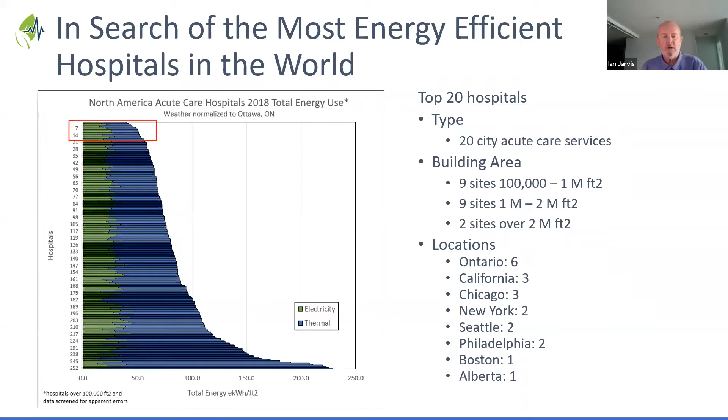So you'll see a lot more over the coming 12 months around finding the most energy efficient hospitals in the world, learning from them. Today, we're going to look particularly at the now 17 operational hospitals in Ontario and what we can learn from them. And those lessons get richer every year.

The other piece of the background I wanted to give you is we don't think that in principle, the roadmap to net zero is that complicated, especially in hospitals. So the 3 steps here, maximizing energy efficiency is self-evident. It's the most economical and efficient way of getting the numbers down. And from the previous chart, we can tell you, we can get pretty much close to half the way from current baselines to net zero just by getting efficiency right.

And that is the #1 task of every hospital on the line here. Where do you stand? How do you get to where you should be at the top of the benchmark chart? Heat recovery in hospitals is a big deal. That's one of the first discussions we had with the folks in the UK. Hospitals generate a huge amount of heat from equipment, from process loads. Recovering that heat, again, is the second most economical way of getting the emissions levels down to where they need to be.

And then, as we know, we have 2 geothermal projects within the group that we'll look at today, but on-site renewables and then purchase credits, that's the simple pathway. Getting it done in individual settings and individual sites is a lot more complicated. And in general, this is all about capital planning and asset management, much more than technology. And it's much more about operations than it is about capital investment.

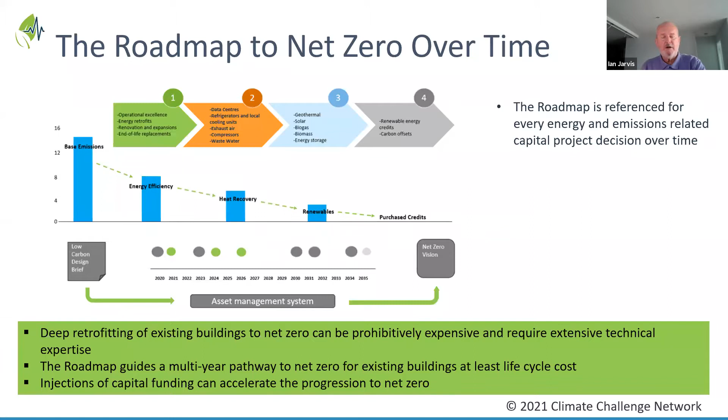So there's a few truisms that are emerging from all of this. But this practical pathway to net zero, we know what the steps are. Now we just have to figure out how to make them work. Let's talk about the big report. These are the hospitals that are taking part or are included in this year's analysis. There are 17 operational hospitals in this group. They add up to about 12.2 million square feet.

As Michael said, if you are one of these hospitals and you don't know what your code is, because we do this reporting anonymously, we always let the individual hospitals know where they stand, but this is not about shaming. And we're going to recognize some of the top performers here today with their permission, because it is about celebrating top performers. It's not about shaming anybody. It's about helping everybody move up the benchmark chart to where they should be.

So if you're one of these hospitals and you don't have your code, drop Michael either a chat or an email right now. He'll give you your code so you can follow the bouncing ball of where you stand relative to the data we're going to share today.

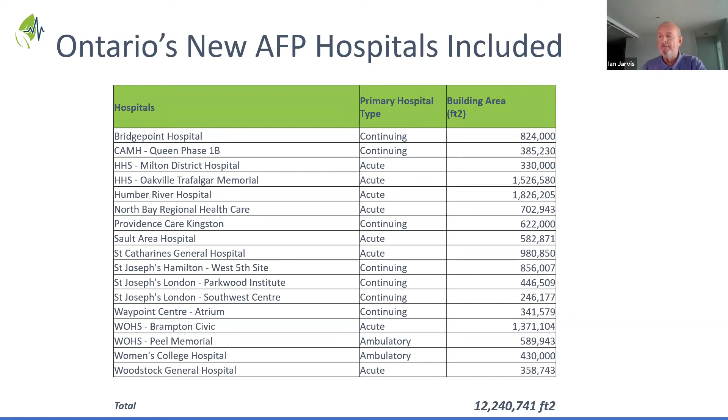The 2021 report is based on the calendar year 2020 data. This is the Greening Healthcare website. I hope that everybody knows where it is, because all of the good background research, all the previous reports are up at this location, but this is what the report looks like.

We're really happy. Chris Mackey, I think you're on the call today.

We're really happy to recognize Providence Care in Kingston as on the cover. We put a different hospital on each cover each year so that people don't mix them up and can't remember which one's which. But Providence Care, one of our top savers, and again, really instructional in terms of all of the hospitals that haven't yet reached the efficiency level that they should be capable of: what does it look like making that kind of progress over time? And we'll share a little bit of information on that going forward.

The core results come in two forms. One is in terms of total energy use, and Greening Healthcare measures the efficiency of hospitals, and this is important, by comparing your actual baseline use to the top quartile energy target for our whole data set for your type of hospital. So when we talk about savings potential, it's comparing your actual current energy use with what the top quartile hospital of your type is doing right now. And that quartile improves a bit every year because everybody's slowly, incrementally improving.

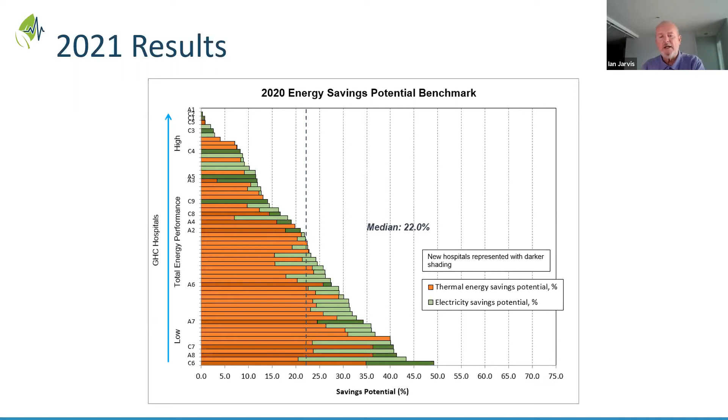So there's lots to learn from that group at the top because they've done it. They got it right. They've got to very high levels of efficiency. And there's lots to learn from the group at the bottom, which is what is not right yet that they're working on, and how can that be folded into the project development process for the more than 30 hospitals that are in the pipeline here, and I think something over 40 in the UK that are working their way through. So it's using the data, learning lessons and applying them so we keep getting better and better, as Michael said, to begin with. I want to take you one level deeper into this, but again, very briefly, all this is documented on the website and the white paper.

But the analysis looks at both electricity use and gas use and separates out the weather sensitive part around cooling electricity from base electricity. So we'll show you in the next chart how those benchmark against each other with these facilities. But essentially we can have a hospital that has very efficient lighting and fans, that has good base electric, but really inefficient air conditioning equipment that has high cooling electric. So the benchmarking goes to base and weather sensitive components on the electrical front. And each of those relates to certain building systems, and that's what guides the conversations we have with the hospitals about where can they improve and what systems should they attend to.

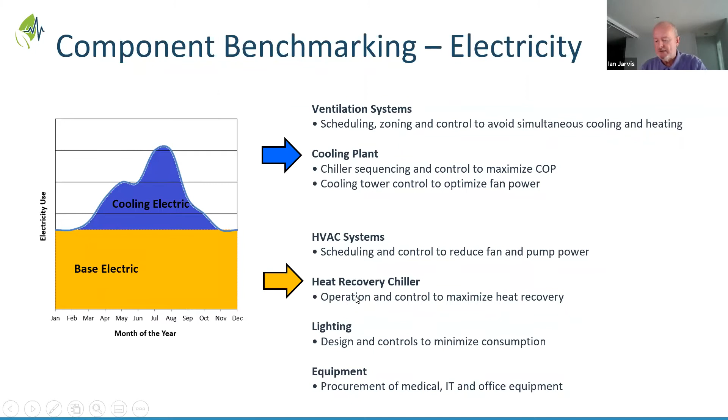The same on the thermal side, except it's flipped the other way during the wintertime. It's ventilation and humidification and building envelope that drive the weather sensitive gas or oil in the winter. And the base thermal is typically reheat and ventilation systems and the efficiency of the heating plant under summer type loads and the operation of process loads.

So again, this is worth looking deeper into, because for any hospital out there, this analysis points you directly to where the opportunities are for you to join those top performers and achieve those high levels of efficiency that we're looking for. So this becomes a big part of your energy efficiency roadmap.

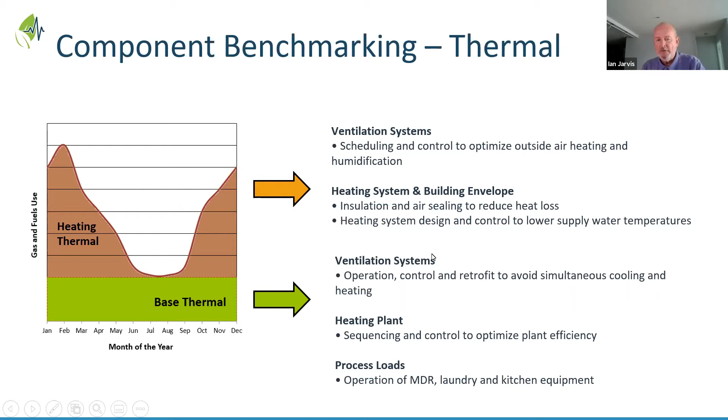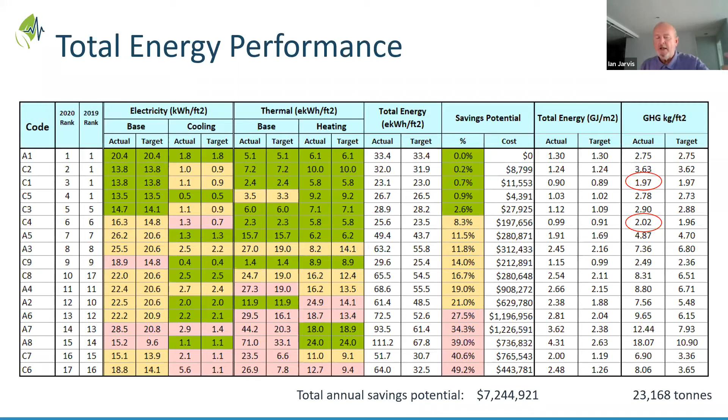and that is Greening Healthcare's goal in all of this, is to move the yardsticks and help everybody work up the benchmark charts that you looked at, and as Michael said, learn from those so that the next group of hospitals coming through will piggyback and be even better still.

We just want to briefly recognize the top performers. So the 4 that are at the top there, the ones that have largely met their, again, good practice targets, not best practice targets: Humber River, St. Joseph's in Hamilton, St. Joseph's Parkwood Institute in London, and William Osler Peel Memorial, and we'll hear a bit about that in just a moment. Peel Memorial right now is the lowest greenhouse gas emitter per square foot of all the hospitals in our data set.

There's geothermal on that site. And again, part of our conversation later with the panel is going to be around how do you incorporate those kinds of, if you like, what have been non-traditional approaches and actually get them in place and make them work. But, you know, we owe a lot to these 4 hospitals for getting it right and giving us the opportunity to figure out what right looks like and then share it with everybody else. So congratulations to the 4 of you.

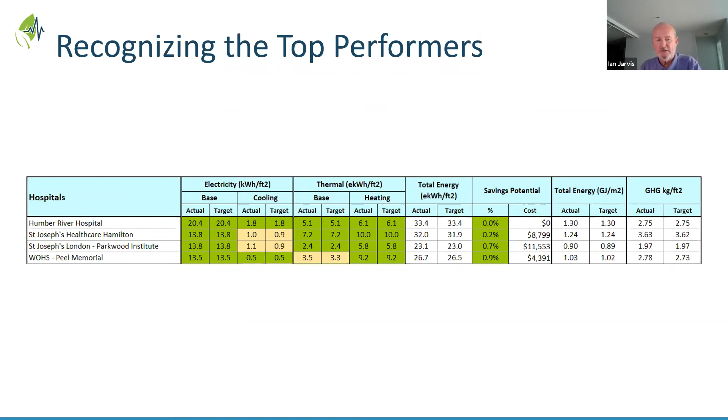We also want to talk about, and when you see the report, this is the whole chart that you see. So we've opened up 2 more columns here. Those columns are the change in energy use, weather normalized from the prior year. So the change from 2019 in electricity and thermal energy use. And again, we're going to look at a few of the hospitals that have had quite remarkable improvements, but the green numbers here are savings.

So over the past 12 months, by getting to grips with the operation of their facilities, they've achieved further efficiency improvements on the electrical side, and where it's red, by the way, they're creeping up a little bit. So again, if you're on this list, you can see that's what happened to you over the past 12 months. And we do want to talk to you about consolidating the savings and addressing the creeping increases.

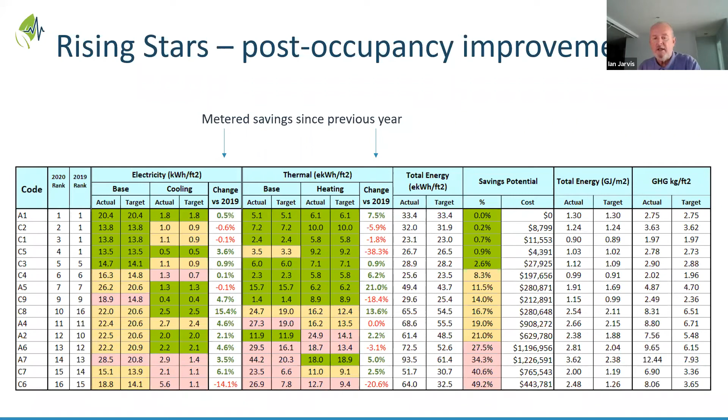But within that, any double-digit number is a big deal. So you see 15% savings on the electrical side on C8. You can see on A5, and you'll hear more about that in just a second, 21% savings on gas, C8, 13%. But it's not consistent, and there are operational problems arising as well as operational success stories. And all of these matter, and they all contribute to the learning.

Quick recognition, Women's College, and these charts, if you haven't seen them before, blue dots are the actual metered monthly energy consumption. The red dots are the weather normalized equivalent numbers for the baseline. So in this case, it's looking back to the first year the hospital was in operation. And what Michael's recorded up there is total energy is down by about 24%. And you can see the big savings electrically as the blue dots are kind of creeping down.

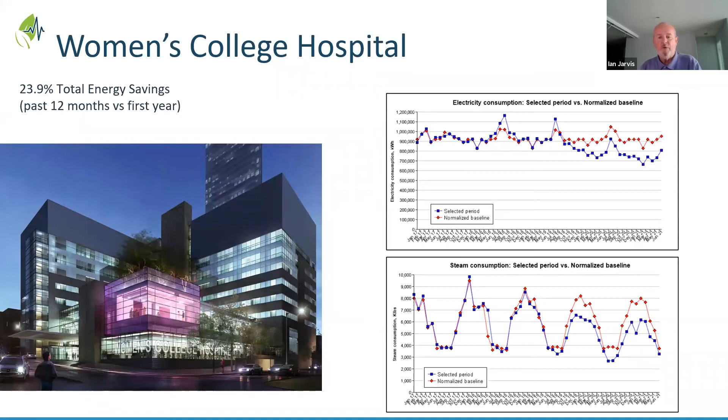And you can see the big effects both in the summer steam use in the lower chart and in the winter steam use. And from conversations with the hospital, this is operational stuff. This is taking the technology and making it work for you. And congratulations to Black and McDonald for the heavy work that they put in there to get these results. And they're still at it, they're still improving.

Similar for Humber River and the work that JCI and the hospital are doing at Humber River, and the same effect. Electricity has come down a bit. And keep in mind that Humber River started as the most efficient hospital that we could find in our database. And these are the improvements it's made since, which is, again, almost 22.5% improvement in energy use by fine tuning and scheduling and working with the hospital departments to run what they've got better.

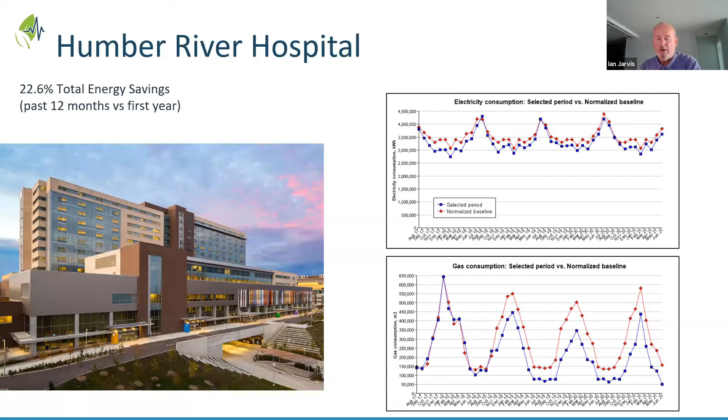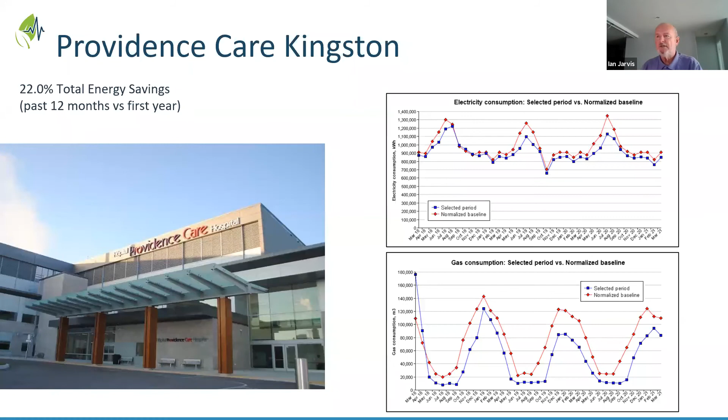And mentioned earlier, Chris Mackey and Providence Care Kingston. Again, this is a JCI project. And you can see how dramatic the improvements are right there. The goal of greening healthcare is to increasingly understand what happened, to package it. And we'll talk at the end about the Humber River Hospital case study we're preparing, to package that in a form that can be handed to the teams developing new hospitals. So as we've been saying, we can get it right the first time. These numbers are big, they matter, and we know how to do better, and we've just got to do it consistently.

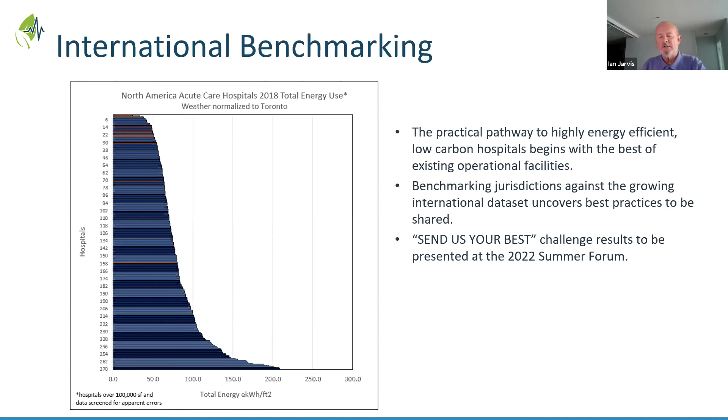But this idea, the practical pathway to get to where we're going begins with the best of existing facilities. As we're beginning international benchmarking, there will be big lessons to learn that may even extend to building codes and practices and standards and construction trends. So we've already initiated the Send Us Your Best challenge, and by the summer of 2022 we will hopefully be sharing a much bigger international data set and have at least a few answers about where the differences are and why.

We also just want to invite people into this. There's a lot of interest in the high performing hospitals, but people don't know how to replicate it directly. So with the support of our local Independent Electricity System Operator, we've initiated a research project into system levels.

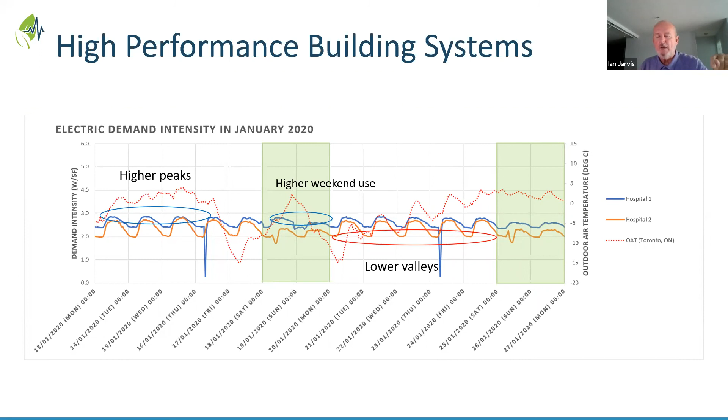So we can use the advanced metering technology to help identify opportunities for better scheduling, as well as load reduction and weekend controls. We're looking at the electrical breakdown in these hospitals from sub-metering data between chillers and pumps, and it's a whole different webinar, but you can see some of the differences.

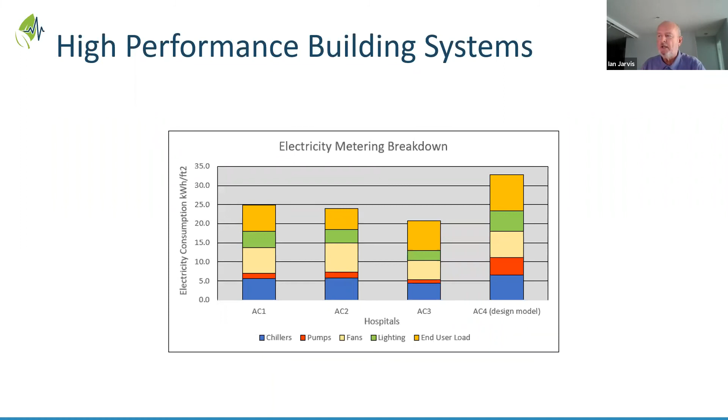And we look at the same thing on the thermal side, and there the differences are quite dramatic. And this is sub-meter data that's actually what the hospitals are using. So now at the systems level, we can compare the higher performing facilities with the lower performing facilities and provide even more specific direction as to where the improvements can be made.

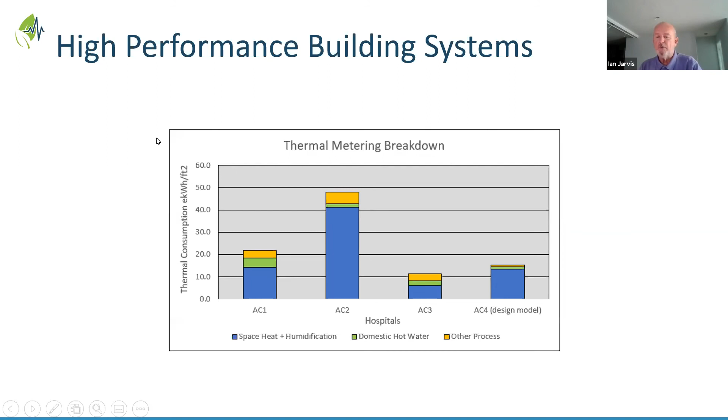Angela and Cliff, I think you'll be interested in the design model that's AC4. The empirical data from real hospitals can be used to calibrate those design models. And not only can they be, they need to be, because a lot of those models are out significantly at the outset, often with assumptions about receptacle load and end user loads and so on. And that has an effect on the overall design and the overall performance going forward.

So where this leads us is this is a big tent. This is a joint effort. We want as many people to help as we can, and we want to help everybody that we can. So on the Send Us Your Best challenge, please, if this recording gets seen around the world, find your best hospital, send them to us. Let's plug them into the charts, and let's find out the differences that can help all of us get better.

And especially hospitals in Ontario, if you're in that 17 group, please do respond to Michael's invitation to join this research and help us through your sub-metering data to help you understand where the opportunities are to join that group of particular hospitals at the top of the benchmark chart.

So, bit of a rush through, but this is the story so far, and you can peruse it at your leisure when the report's out at the end of the month. But the big deals for us so far that keep coming through: the targets really matter. Setting targets for hospitals really matters, and it's not an academic exercise. The likelihood is that where your hospital ends up is where you set the target to begin with, and that's certainly been Humber River's experience. What's driving them is to meet the target that was originally set.

That operational improvements are as big a deal as design. Cliff Harvey in the panel will be talking about how you need lead times. You can't design a better hospital if you don't have time. And I don't know how many times we've heard that's a really good idea, but we've got to open in 3 years. There's no time to look at this, to consider it. Lead times really matter, and who gets involved when really matters.